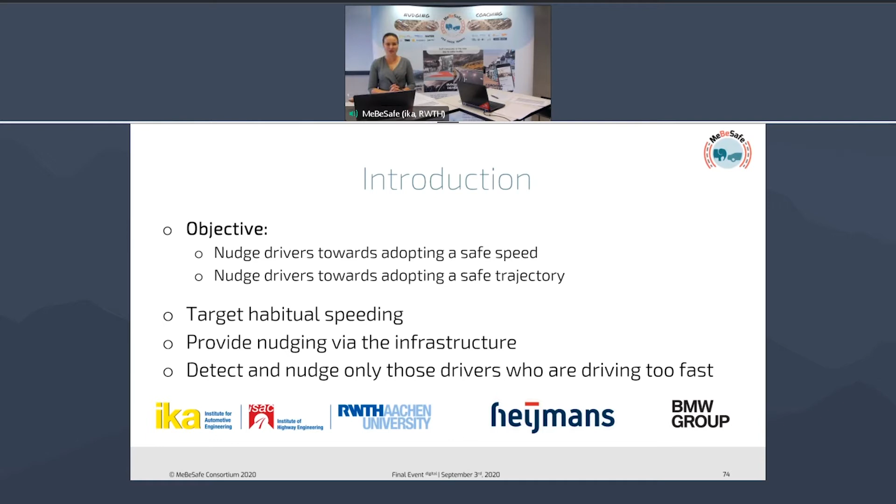So if we go one slide further, here I have listed the approach that we took in this work package, and we did that together with the Institute of Highway Engineering, also located at RWTH Aachen University, with Heijmans in the Netherlands, and BMW. First, we derived the measures and selected the location. So we asked ourselves, how could we nudge drivers towards adopting a safe speed? What is the basis on the psychological side to nudge drivers towards this? And what would be an appropriate location? We'll come to that in a bit.

But then we conducted driving simulator studies here at our simulator at IKA. We then added a Monte Carlo simulation by BMW, which investigates the potential impact of the infrastructure nudge in terms of traffic safety, and also had the objective to provide information for the technical development of the infrastructure nudge. And then, of course, the technology itself had to be developed to fit this nudging measure. So existing technologies came in, and something new was formed and developed anew. We had the detection and intelligent vehicle data developed by ISAC here, and this then fed into the decision control logic and the lights that were developed and prepared by Heijmans in the Netherlands.

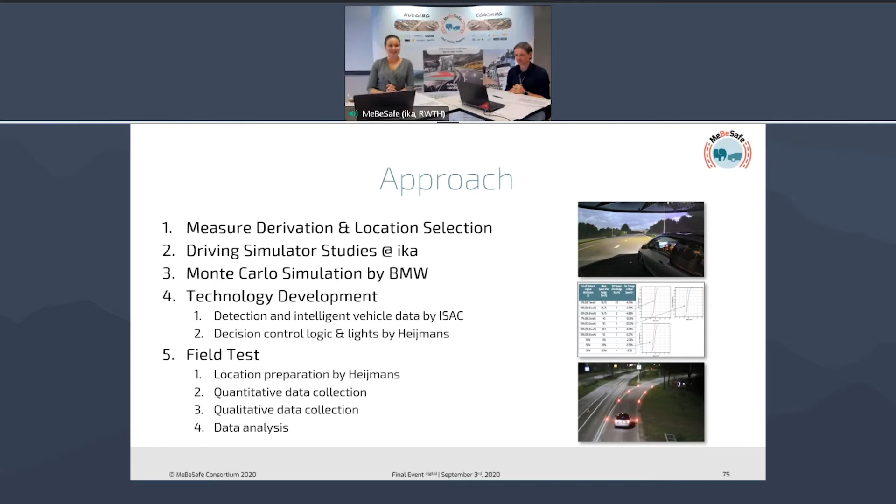So if we go now one slide further, you can see a motorway exit in Eindhoven in the Netherlands. We chose this motorway exit. On the left you can see the top view, and in the middle you can see the view onto the motorway exit from a bridge just before this exit going over the motorway. For those of you familiar with the Eindhoven area, when you come from outside the city, it is a motorway going into the city center. So at the location where the motorway exit starts, people had to go down from 100 to 70 kilometers per hour, several meters before the exit.

Within the exit, we have 70, and at the end of the exit, in the middle picture, you can see a very small car that is already in the exit. And very much at that position, we have a 50 km/h sign. So there, the speed limit changes to 50. And well, we chose this location because this is a location where speeding can happen habitually. And this also shows a higher probability for almost accidents or risky situations in general.

People do know exit situations very well, but as you can see here on the picture, we have many trees around it, so obstructed view, and the curve is getting narrower and narrower. So if you're not familiar with the exit, you might not know that this curve is getting narrower. And when you are in the curve and realize that you might be too fast for this curve, you might get into a risky situation.

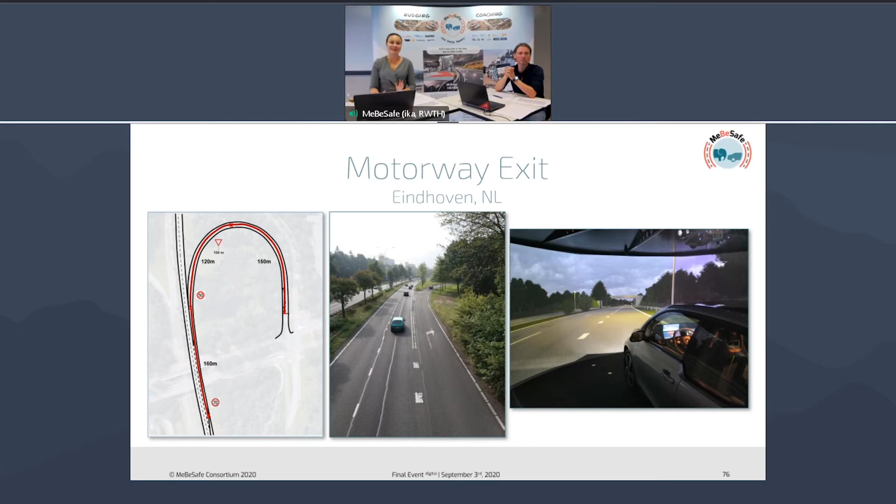However, why did we know that this motorway exit was a good location for our measure? And if we go to the next slide, we can see. There was a baseline measurement that was conducted by ISAC, and we have 3 radars that were put up before any nudging measure was put into the road. And the 3 pictures to the right depict the speed that was measured at those 3 radar stations.

And the first radar is not the most interesting one, but you can see there are people driving over 70. And to me personally, if I go to the Netherlands driving, I just stick very strictly to the speed limit, because it is so much more expensive than in Germany. But not all people are, and not everyone might be as focused on the speed when they're driving there.

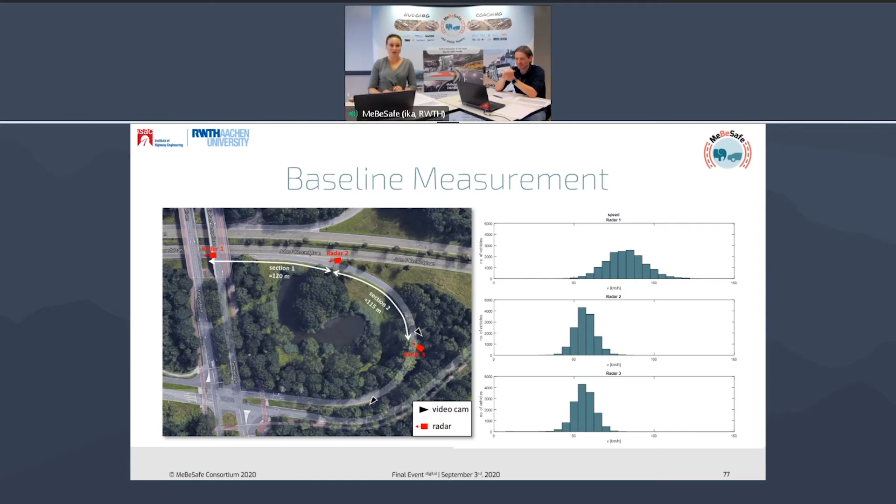So if you look at the second and the third radar, you can see that the majority of drivers is well above 50 km/h. So there's definitely the potential to nudge drivers down here. So into the derivation or the development of the measures, and if we have a look at the next slide, we asked ourselves, how can drivers be nudged towards reducing their speed in such a motorway exit situation?

And if we click once more, we started with a free collection with everyone who was interested from the consortium and from the partners. And we collected possible and impossible nudging measures according to the design criteria developed in the integrated framework that was presented by Marianne Carlson earlier. And then we derived the expected behavior from these solutions, like, okay, according to existing psychological principles as well, what kind of behavior do we expect?

Well, then we had to go further and reduce this wide collection of potential measures to medium-term feasible technical solutions. So we wanted to test this in the simulator and then take exactly this measure and test it in the field, which is, well, what we did. But for that, we had to test something in the simulation that could actually be implemented in the field.

We prioritized factors to be tested that we wanted to focus on, for example, color or movement of lights. And then we prepared and conducted our simulator testing. And this is what I would like to come to next. So we put light stimuli on the exit lane, that is, on both sides of the road at road level.

And those are supposed to be only turned on if the car is coming in too fast, and they are aiming at signaling to the driver that they are driving too fast, and should have a decelerating effect on the speeding driver.

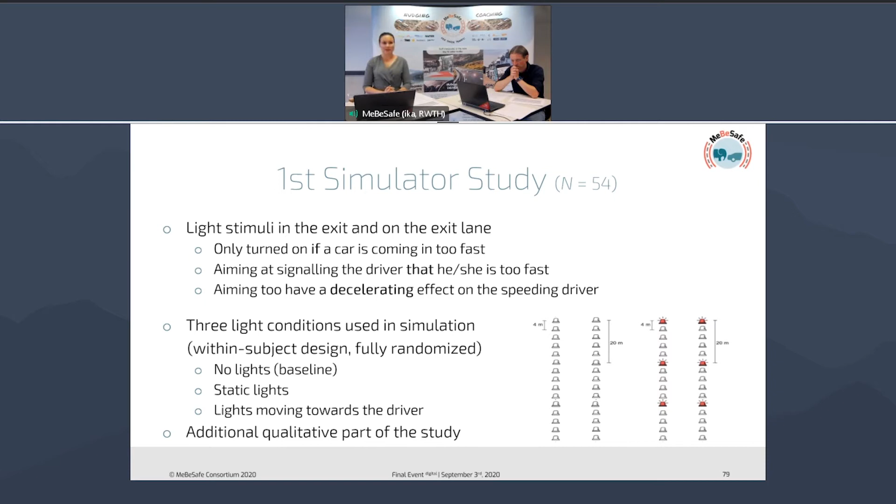And if we go further, you can see a bird's eye view of the location Eindhoven. So in the middle, you can see the exit. If we go one step further, we can see what it looked like in our simulation software. And one step more, this is what the participants saw when they were in the middle of the exit. So right now you might think, well, that is not a very bright light, or that's a very small stimulus. Yes, but you're seeing a very small picture.

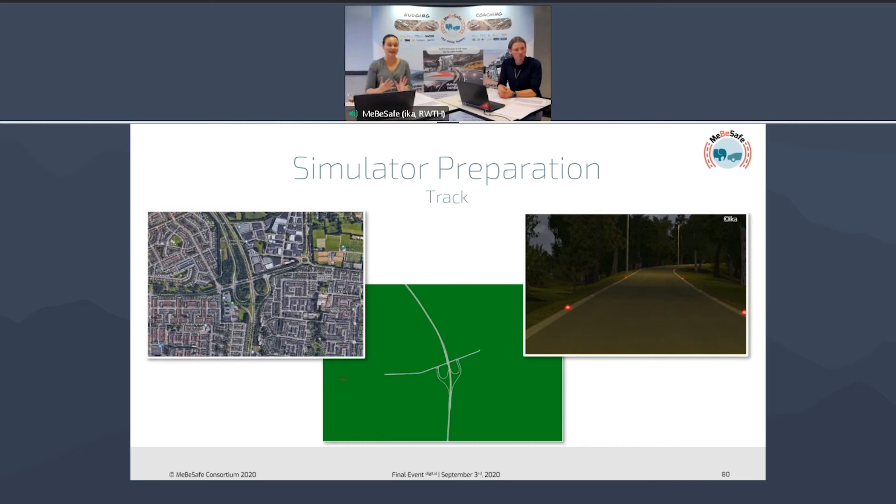So imagine driving in that location, or in our simulator where you have 180 degree screens and further screens for the rear view. And the lights are also moving past you, and that creates a perception of speed there.

Going further, what we found was velocity decreased earlier when the lights appeared on the road compared to no lights, and especially the lights moving towards the driver resulted in earlier reaction of the driver. One possible reason for this could be that there is a higher alertness of drivers because of this movement component, and we found this preference for lights moving towards the driver quantitatively and qualitatively. So both in the driving data and when we asked people.

And we tested different colors, for example, green lights, amber lights, white lights, in a qualitative part of the study, and red lights were perceived as most effective.

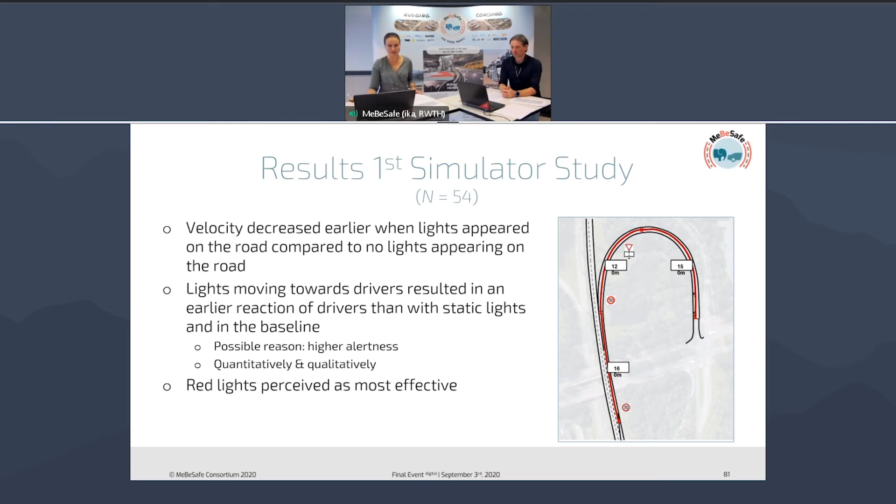We wanted to go further and conduct a second simulator study on the impact on drivers' attention, and we used a secondary task here. When drivers, while driving, reduce their secondary task activity, this provides information on the focus of attention of the driver. So it's most likely that the attention shifts from the secondary task to the driving task, which is exactly what is written here in that second point.

So if we go one step further, we again had our 3 light conditions, substituted static lights with blinking lights, and had 3 secondary task conditions with an auditory secondary task or also visual secondary task, just to have a look at different modalities here.

And what we found was that performance in the visual secondary task was lower than for the auditory secondary task. So of course we need our eyes for driving, which is why we cannot look at the secondary task at the same time. And attention was drawn to the driving task when the lights were there compared to the baseline. So the lights draw the driver's attention to the driving task, and have them focus on where they are supposed to in that situation. So we do have a speed decrease, and we do have a shift in the focus of attention.

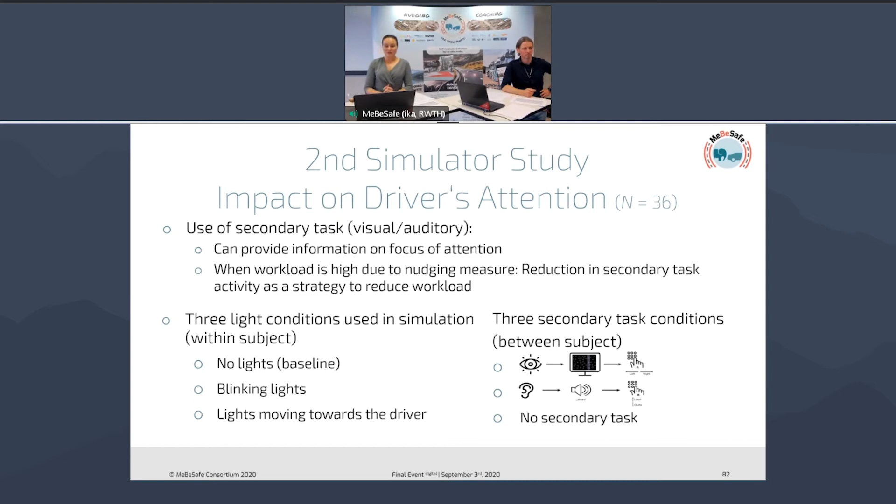Going further, we had a test in Aachen for software development, especially the technical development, which I indicated earlier was done by Isaac and Clement. And what you can see here are pictures of thermal imaging cameras. So in the field, the system is able to detect drivers that are going too fast, and turns the nudging system on only for those drivers who are speeding.

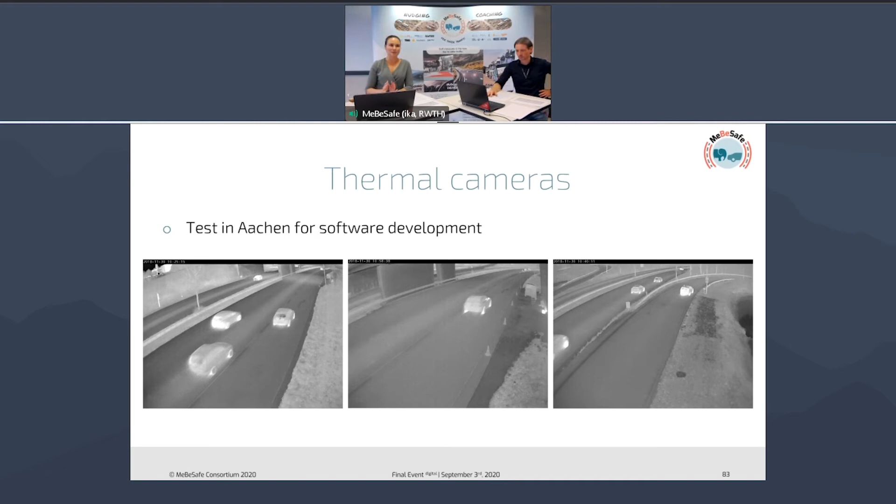And of course, we have aspects like data protection. And as you can see here, we are not able to distinguish any number plates, any people or car brands, colors, whatever. This is anonymous.

And if we go one step further, I hope this video works for you. This is how the system detects the cars. There's a coordinate system, and then we are able to transfer this to a database. I'll let that roll for a second until the video is finishing. So as you can see, this is real-time processing, and the delay is minimal.

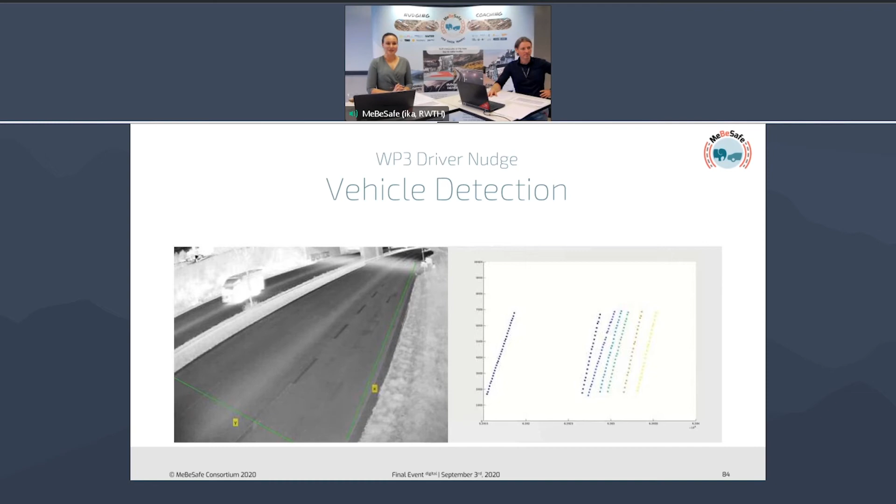Going one slide further, we can see that we then mounted the cameras, as you can see on the light, onto the motorway exit. And now you're coming from the top if you have a look at this picture here. And we have 4 cameras, 3 needed to detect the drivers, and we have a real-time detection.

So when a driver comes into the motorway exit and is detected as driving too fast, the light system is turned on. If they slow down enough, the camera system, the decision control logic, detects that and turns off. If he speeds up again, it can be turned on again. And on the right, you can see the threshold that is put in between. We have drivers, when they are 10% above, they will be nudged. And if they are below, they will not be nudged.

And that decreases from the beginning of the motorway exit, where we have 70 kilometers per hour allowed, until just before the 50 kilometers per hour sign, because we want to gradually nudge them down, that they have safe and slower speed when they are in the curve of this exit.

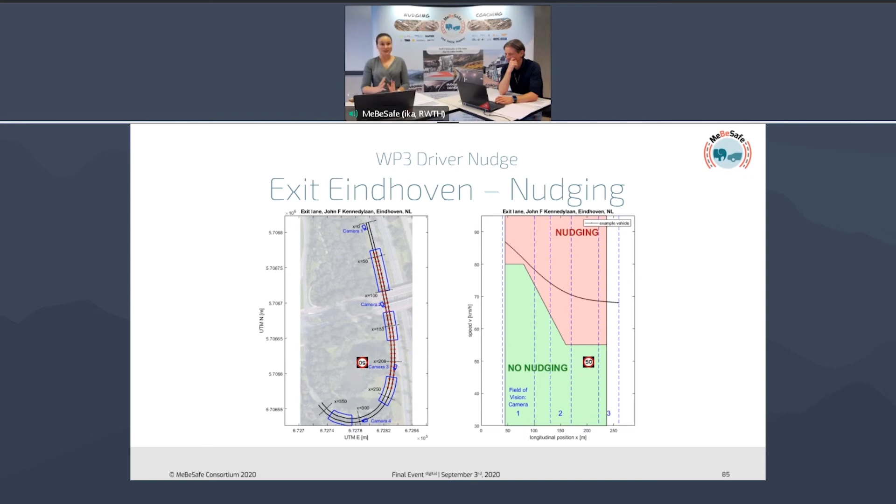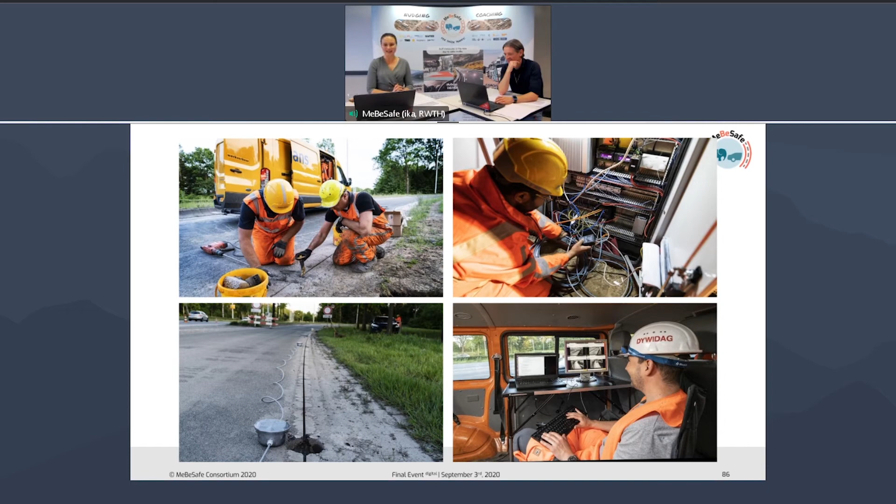Yes, we then went further, and you can see here how the lights were built into the road. So it was actually drilled in there, lots of cabling, and lots of on-site work by the colleagues of Heinz and Isaac as well to calibrate the camera. And yeah, we then had it established.

Yeah, then we tested several scenarios in the field, and this is just a quick overview. But as you can see on the right, we had each scenario activated for a week, and there were almost 20,000 vehicles per week, if we have an overall look, and per nudging scenario that were driving through the exit.

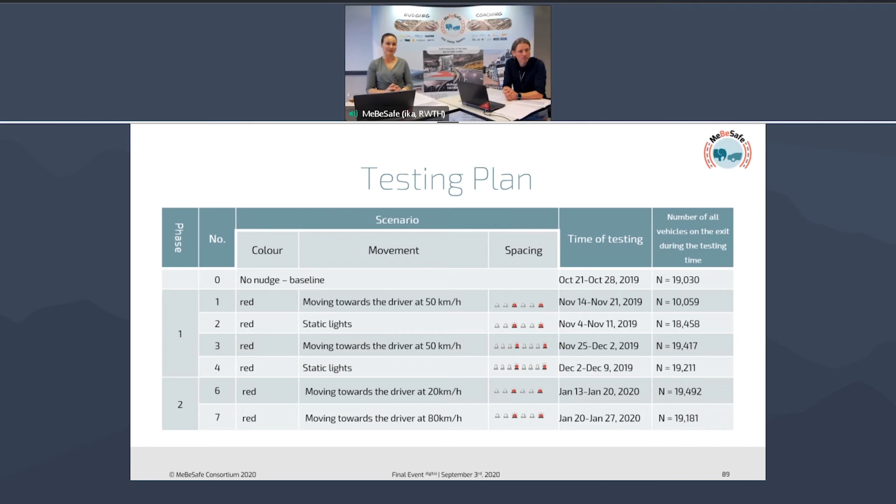And yeah, if we look into the middle, we had different variations of how many lights are activated, static lights moving towards the driver, but as we found red as the most appropriate color in the simulator study, with a potentially greatest effect here, we put this into the field test. If we go one slide further, we also varied different light movement speeds, and what we also did was that we varied how many lights were activated at once. And still, we do have quite large sample sizes here.

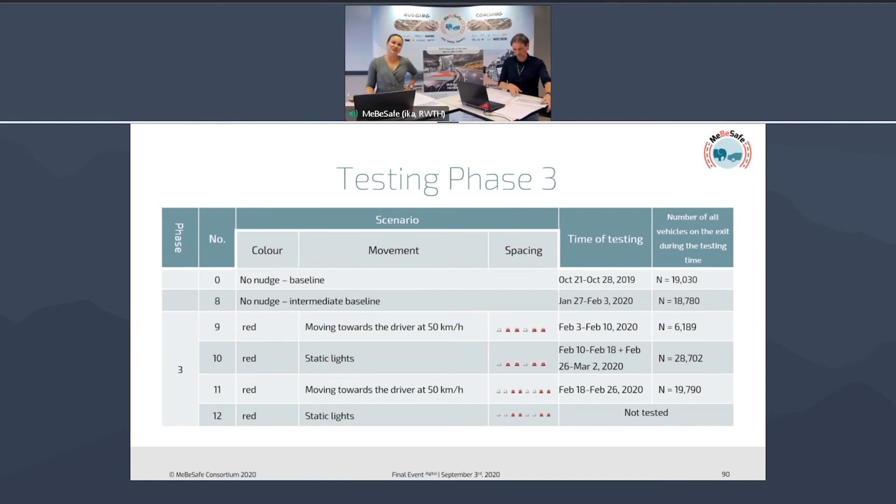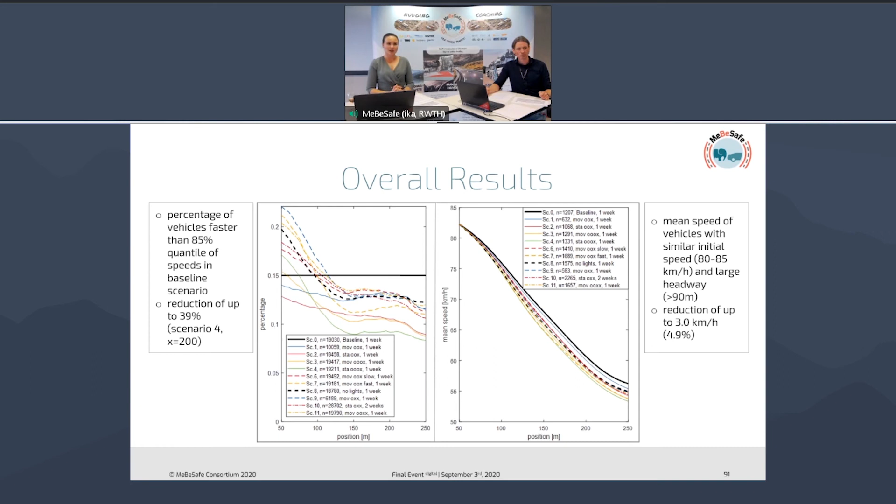But that is enough if they are not driving too fast. We went into behavioral analysis, and if we have a look at the next slide, this is just an overview, and I'll just tell a few details. This is just testing phase 1 with 4 nudging scenarios with different variations in the baseline. And when we compare the stimulus onset and the position where the 50 km/h sign is, we do see a significant difference between the nudging scenarios.

And if we go into post hoc analysis, what I'm not going to bore you with today, we can actually see that we do have a decrease in speed, especially in static light scenarios, but also in some conditions, the lights moving towards the driver are very promising in slowing down drivers in a controlled way.

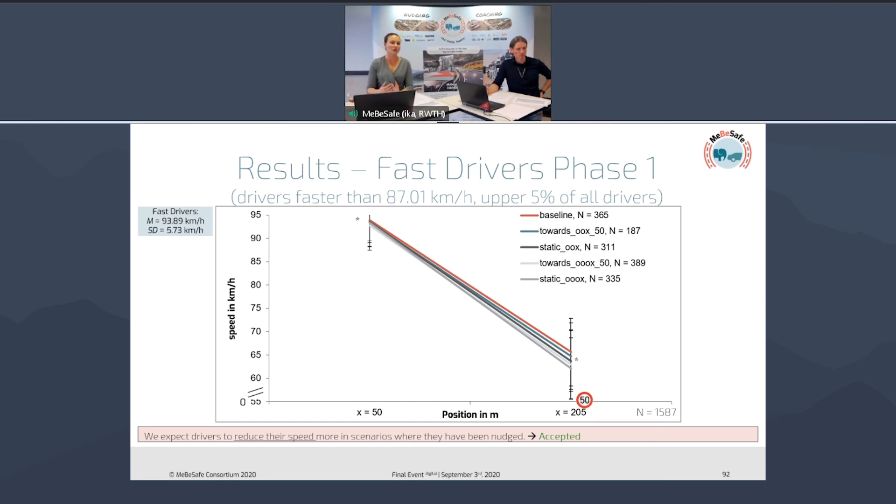We also asked people on site, if we go one slide further, online what they thought about the measure. This is just one example for the qualitative data collection that we did, and we were able together with our partners to distribute an online resident survey, and I already saw Milou on the line earlier who worked on this as well. And here we were able to distribute this questionnaire in the residential area around, and the general attitude of drivers was very positive towards the measure.

Like, yes, I don't think it distracts me too much. It is good for drawing my attention to the driving task, and I think that the lights are suitable to decrease my speed. And in another on-site survey that we did, apart from this online resident survey, and in the simulator studies, it was the same for all the data collections that we did. People liked the measure. They thought that it would work, which it did. Drivers actually thought that the lights moving towards them would work best to slow them down.

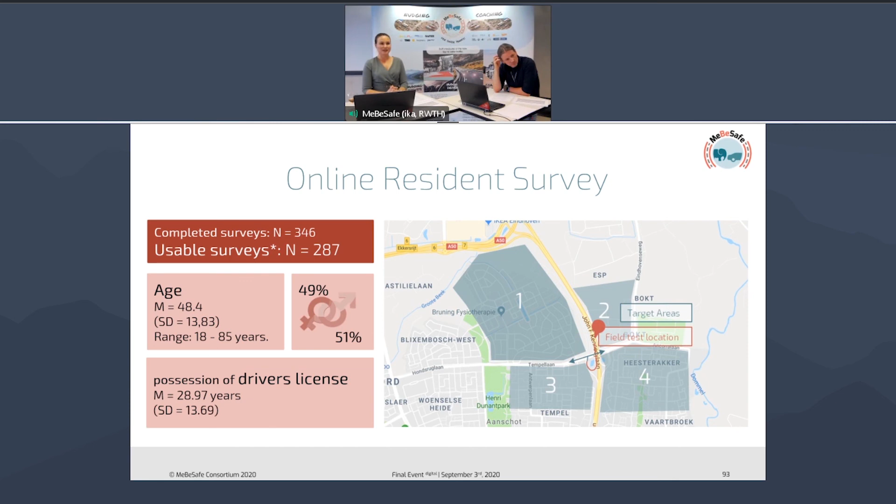So if we go one slide further, there's just an example, and we asked them, if you could choose, which traffic measure would you use to reduce your driving speed? And they were asked to rank their reply. And in red here, you can see the first choice, and the highest proportion of first choices was the traffic sign, which is the 50 or 70 km/h sign, together with a light system.

And they compared that to a traffic sign with a speed cam, which people accepted as well. And just the mere traffic sign without any intervention, which you could imagine is the most familiar to people, did not have that much of a positive reply as the traffic sign with the light system here.

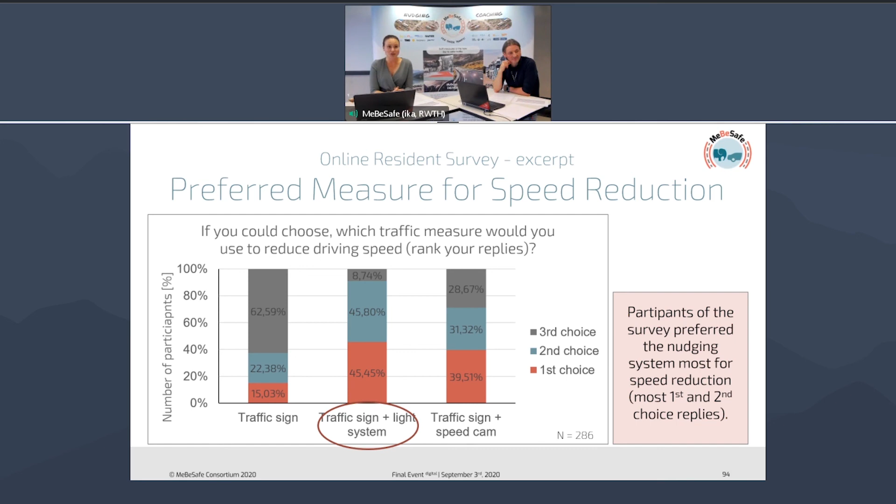To conclude my presentation, we saw in the field test, after we had conducted our simulator studies and the Monte Carlo simulation to see what measure would be working, that the infrastructure measure can actually reduce speed by approximately 5%, and it can also reduce the percentage of fast vehicles by up to 40%.

Of course, research is never done. So future research should, for example, focus on replication of the results in various locations, in different weather conditions, with different groups of drivers, because here we're in a residential area. We could imagine that people are quite used to the exit, even though that's not a must, and because we have an anonymized data collection of the quantitative results, we cannot say that. But it could also be possible to transfer this principle to other means of application, so other behaviors than speed and other locations if needed.